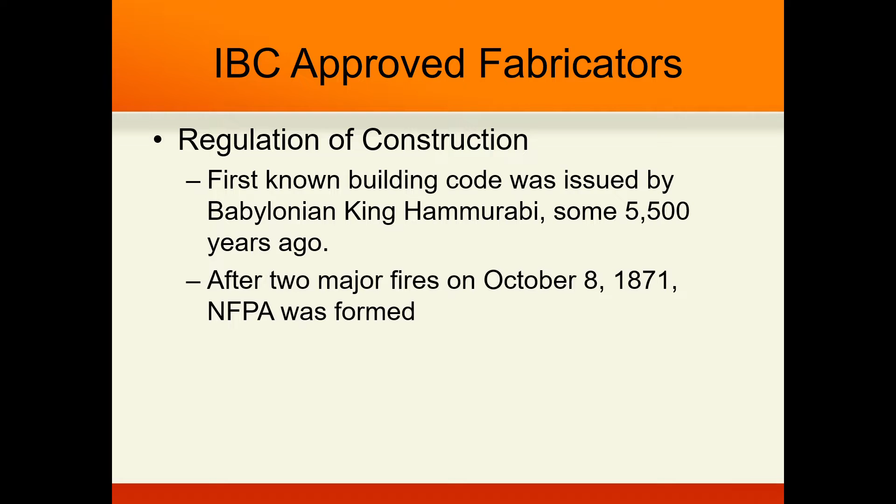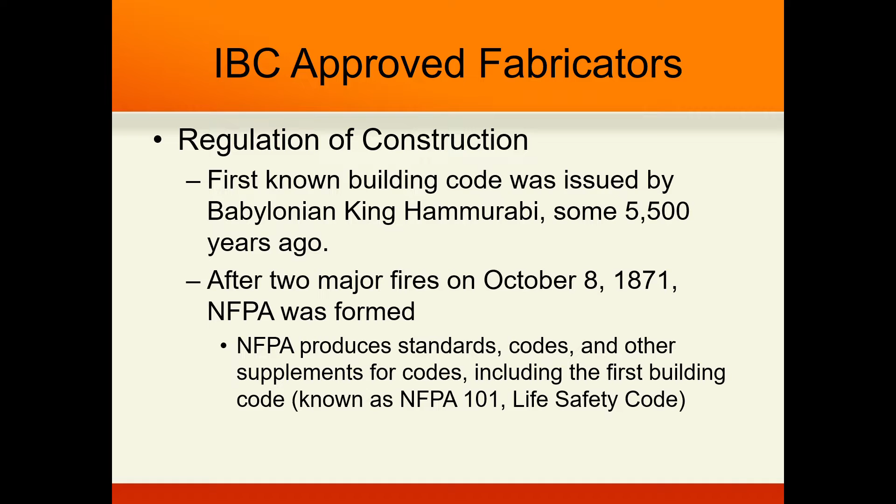After two major fires on October 8, 1871, the NFPA was formed. NFPA produces standards, codes, and other supplements for construction, including the NFPA 101, which is known as the Life Safety Code.

Regulation of construction in today's world has two types of codes. Number one, construction codes. These are codes that regulate how things are constructed. And then, of course, maintenance codes. Those are the codes that are more oriented to how we maintain once we get the certificate of occupancy and we start using the building.

So I want to get into a little bit more of the legacy codes before we proceed, as they lay the foundation for special inspections and for approved fabricators. This is information that we didn't cover in the exiting video, so pay attention right now. This is new information.

The legacy codes were the codes that existed after the original exiting code of the NFPA back in 1927 to the more modern times, which extended all the way to the earliest part of my career. There were three main model code agencies across this country. They had their own three separate codes. They were pretty much similar in many respects, though, and they came together somewhere around 1994-95.

To form what is now ICC, the International Code Council. And of course, the International Code Council published their very first IBC, International Building Code, in 2000.

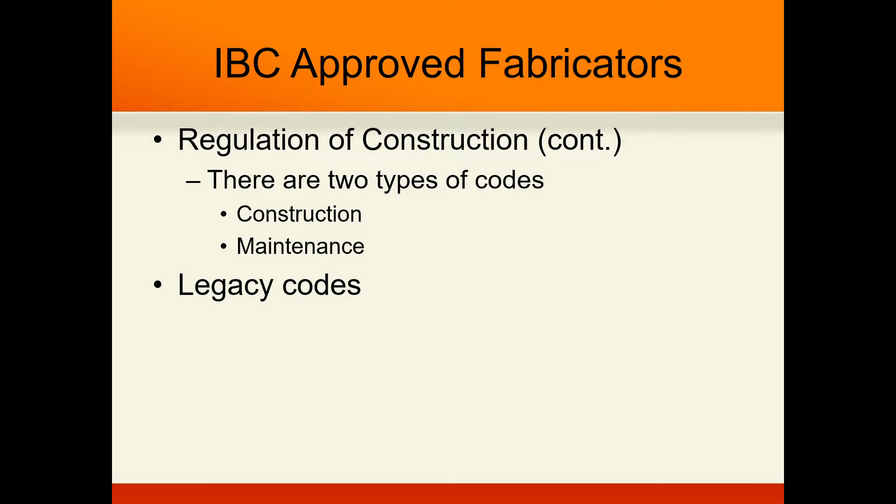So as we know, the legacy code first started with the largest one I think that I'm aware of, which was ICBO, based out of Whittier. They had the Uniform Building Code. It set up in 1927 its inspections for structural components as a requirement for the first time.

And then, of course, the term special inspections came out of the UBC in the 1961 edition.

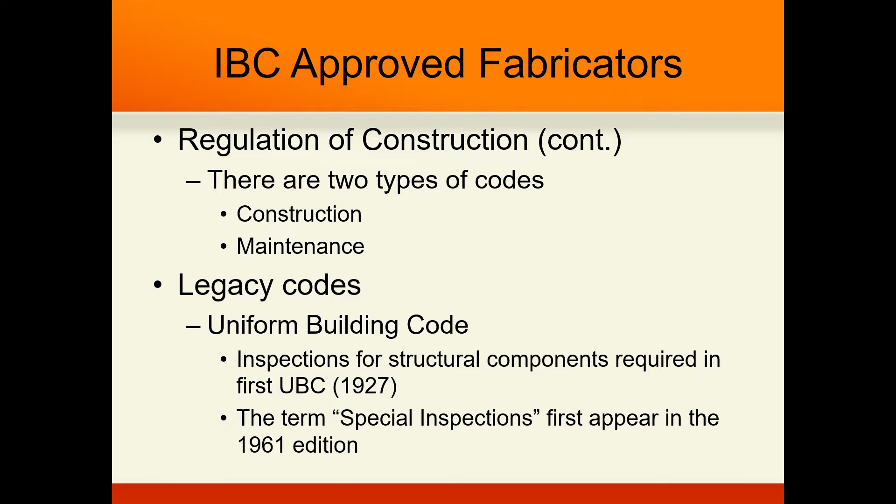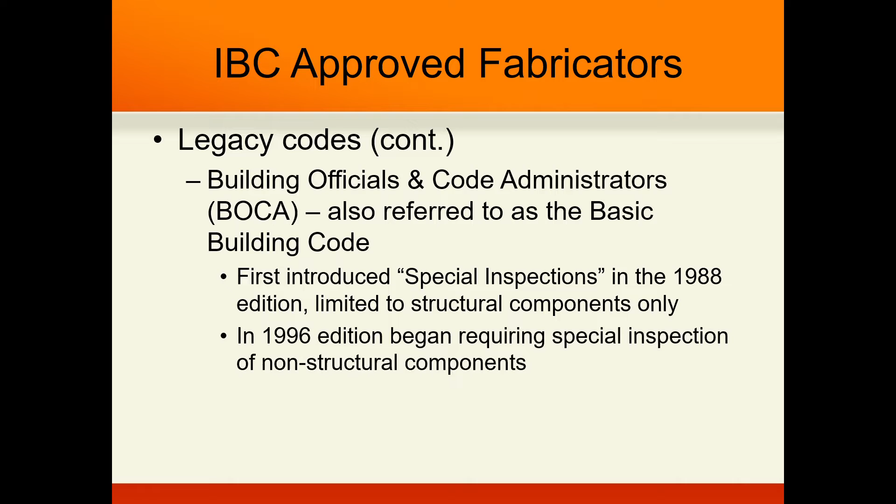Then the second code I want to talk about is the Building Officials and Code Administrators, or the BOCA code, also referred to as the Basic Building Code. The Basic Building Code, of course, first introduced special inspections in 1988 and limited those special inspections to structural components only. And then in the 1996 edition, they began requiring special inspections on non-structural components.

And then, of course, the last one is the Standard, or the Southern Building Code, published by the Southern Building Code Congress. Most everyone referred to it as the Southern, but I remember it being called the Standard as well. It was first published in 1945, so it was kind of the latecomer of those three legacy code groups that did model codes.

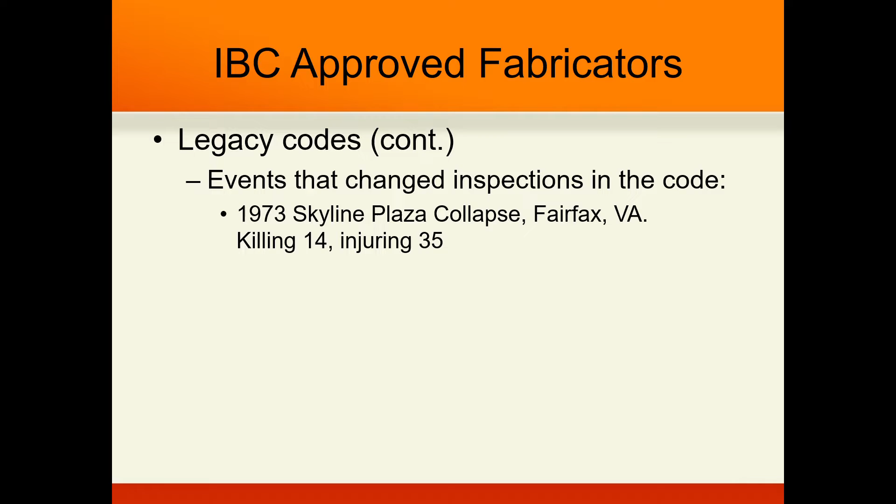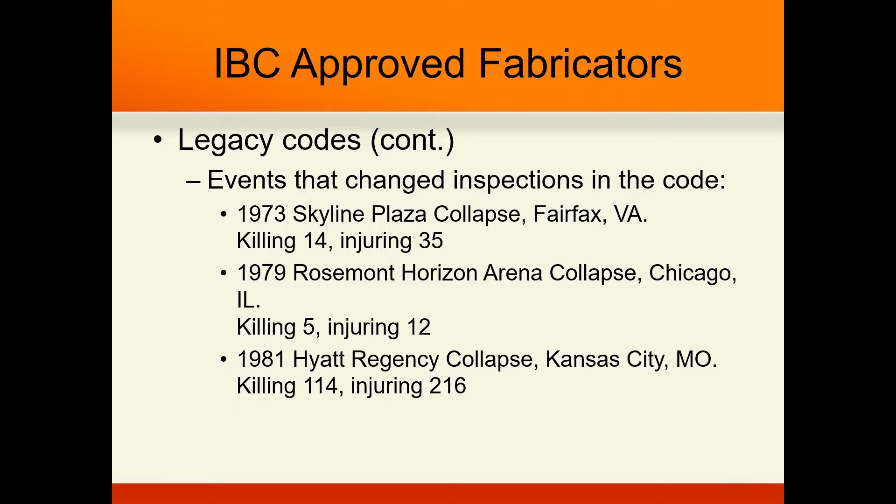All three code development groups were affected by some major events. First was the 1973 Skyline Plaza collapse in Fairfax, Virginia, killing 14, injuring 35. Then in 1979, the Rosemont Horizon Arena collapse in Chicago, Illinois, killing 5, injuring 12. You can look these up. And of course, the one I'm most familiar with, because it occurred very early in my career, the 1981 Hyatt Regency collapse in Kansas City, Missouri, killing 114, injuring 216. To this day, that's by far the most deadly design defect event we've seen in our industry, in our country's history.

I want to remind you that regulation of construction is found in the IBC, the International Building Code, as well as other codes. Be sure to look at the exiting video. Building codes focus on protection during a single event, not multiple events simultaneously - in other words, a fire in a single location, a collapse at a single spot. They don't look at multiple events because it's too hard to control those variables. It would make construction almost virtually impossible to afford economically.

The IBC is also known as a performance code, unlike the legacy codes, which were strictly prescriptive. But as I said before, this isn't a performance code like we see in Europe. It does have in Chapter 1 some latitude to give the building official ability to work with designers to base more on performance, but it still has its prescriptive sections, and that's why we're still a little bit in the dark ages compared to Europe, with their building codes being so progressive with the performance base, laying that responsibility on the designers.

So regulation in the U.S. today - the regulations for construction are found in the IBC. Today, as always, we're going to be looking at the 2018 edition, just because the 2021 hasn't seen widespread adoption. More than likely it probably won't either, just because of the way the cycles work. It probably won't be until the next release in 3 years that we'll see jurisdictions accepting the newer edition.

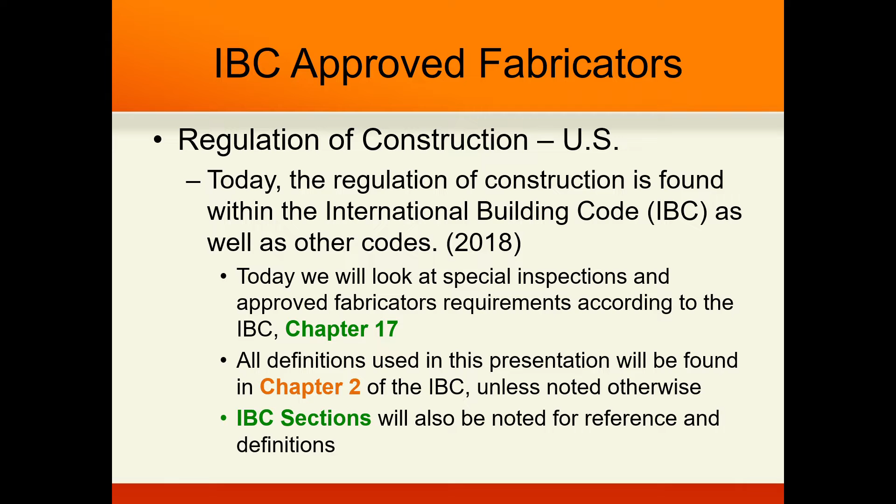Today, when we look at special inspections and approved fabricators, it's all going to be coming out of Chapter 17 of the IBC. Of course, definitions will be found in Chapter 2, may be found in other places, but most of it coming in Chapter 2. And of course, we will always be citing IBC sections, so you have a reference you can go back and look to.

And then we'll move into the special inspections. So IBC section 110 actually names off all the inspections that need to be. 110.2 talks about the preliminary inspection - that's usually typically a kickoff. Of course, then we have our required inspections found in 110.3, and those sub-paragraphs of that.

We start, of course, with footings, then we get into concrete slab and under the floor, our lowest floor elevation, framing. Anyone who's built has seen all these before anyway. Lath and gypsum board being next. Weather exposed balcony and walking surfaces. Of course, fire and smoke resistant penetrations - this is key because usually these are in rated constructions that are very, very important for evacuation of human life in a building during a fire event.

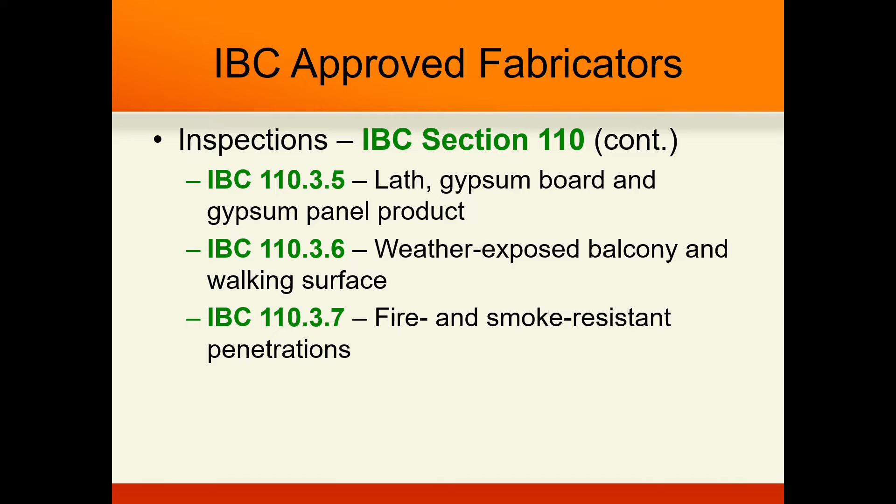Of course, then we've got the energy efficiency, and they have some miscellaneous things listed in 110.3.9. Now we move to 110.3.10, which is the special inspection, and of course it references back to Chapter 17. We're going to spend a lot of this video looking at Chapter 17. And then, of course, our final inspection. After you get your final inspection, usually you will end up getting your certificate of occupancy, your C of O, and the owner will now have use of that space for whatever their needs were when we designed it.

So now we'll look at the special inspections definition. This is the key to everything that we're going to be talking about, because special inspections are the key to the approved fabricator as well as to the field work.

Again, it's looking not just at the code, but at what was designed, to make sure the design intent's being met as well. There are two types of special inspections. There's the continuous special inspection, which means the special inspector is there at all times during the work being done. And then there's the periodic special inspection, which means the special inspector is only there intermittently during the work being done, and that all depends on what is being inspected, what's being constructed, what's being built, whether it's in shop or not.

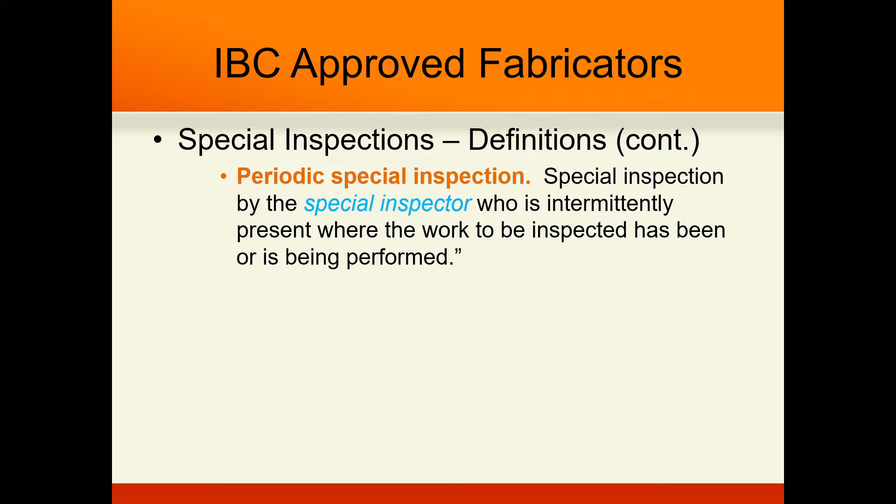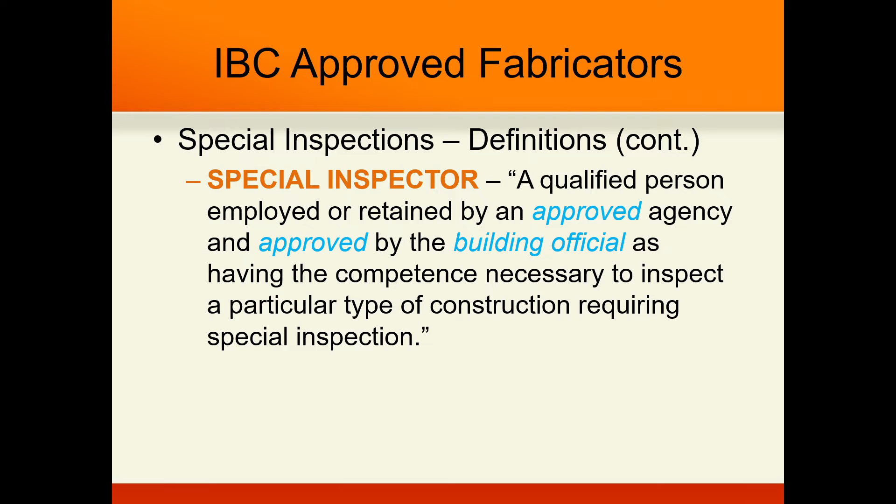Special inspector is defined as a person who is qualified by an approved agency, and that's defined also in the code, and approved by the building official. Sometimes these are people who are highly trained, welding inspectors in particular.

IBC 1704.2.1 mentions the qualifications. It must be documented what the special inspector's competence is related to this. There is one caveat: the registrant of record and their staff for the project may also act as an approved agency. In other words, just as the design engineer or the design architect, you can be the special inspector as well. That certainly carries on liabilities. So if a designer is doing that, make sure you do have expertise in it, because otherwise you're going to be putting yourself into a high level of liability for really not worth the risk, in my opinion.

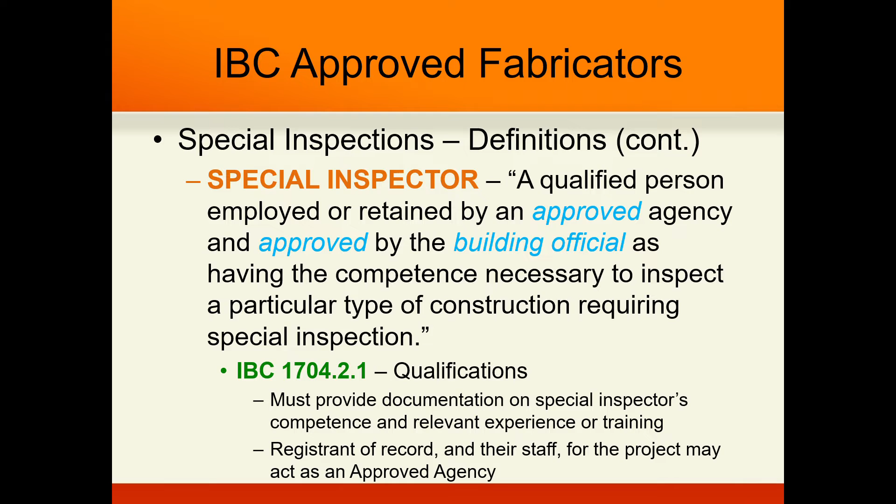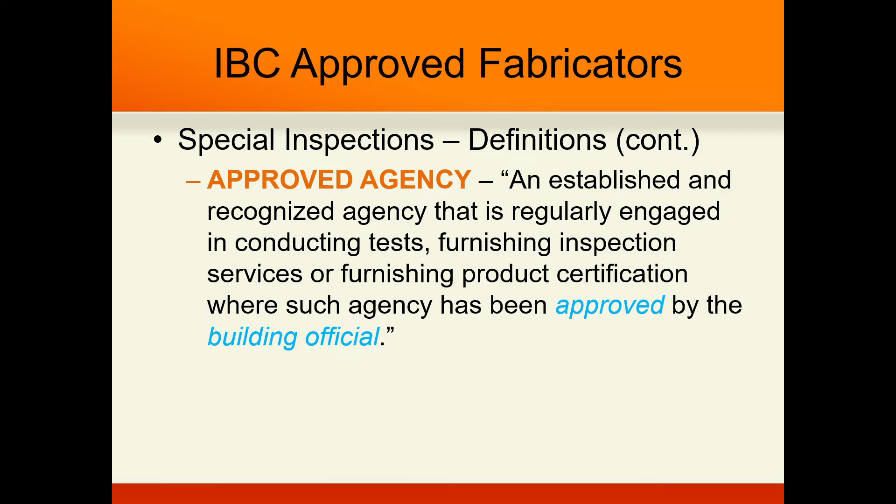Special inspection, the approved agency here - we see what the code mentions, how it is very much approved by the building official. We do have third-party companies out there, and you can look them up on the internet, but those are approved by most of these agencies, and each jurisdiction will have to have their own list, or they may have a couple of them. Several jurisdictions may go together and say, we're going to put this list together and accept it no matter what. Or a smaller jurisdiction may say, we'll accept the list of the larger jurisdiction who's not far away. So it's not necessarily an arduous thing, but it is something every jurisdiction must have. They must make sure they have those approvals in place, just because the code requires it, and it makes it easier for us as designers to comply.

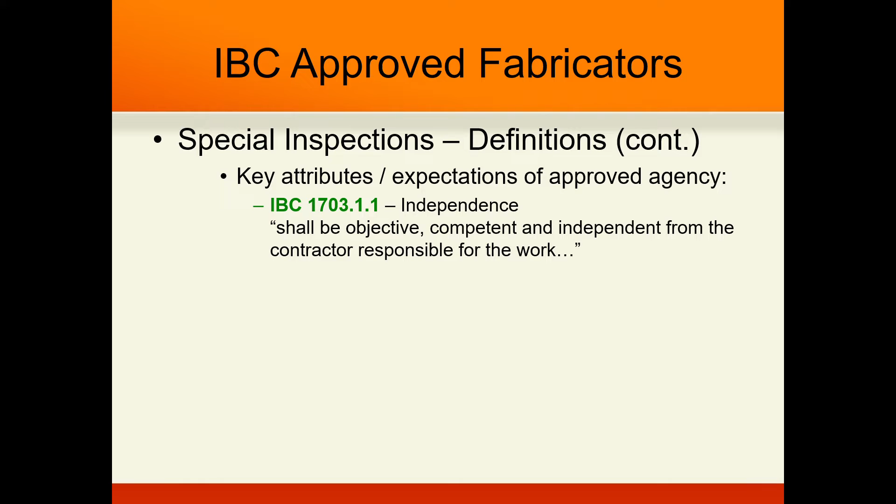Key attributes or expectations of approval of an approved agency: number one, they've got to be independent - independent from the contractor and the work being done. They have to have the equipment; if you're doing testing, you've got to have the equipment. If you don't have the equipment, you're not qualified to do it. So that's a big thing with it. And then, of course, the personnel. Each person responsible has got to be trained, has to understand what they're really looking at, and be capable of knowing if this is being done appropriately.

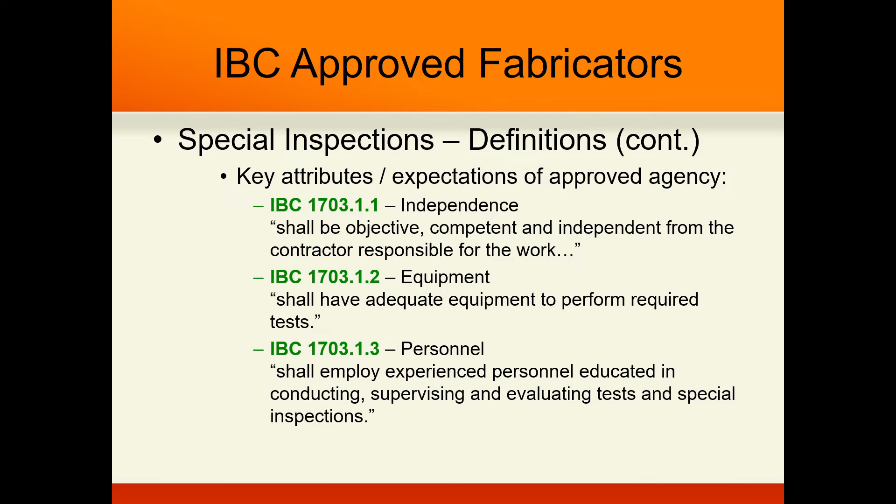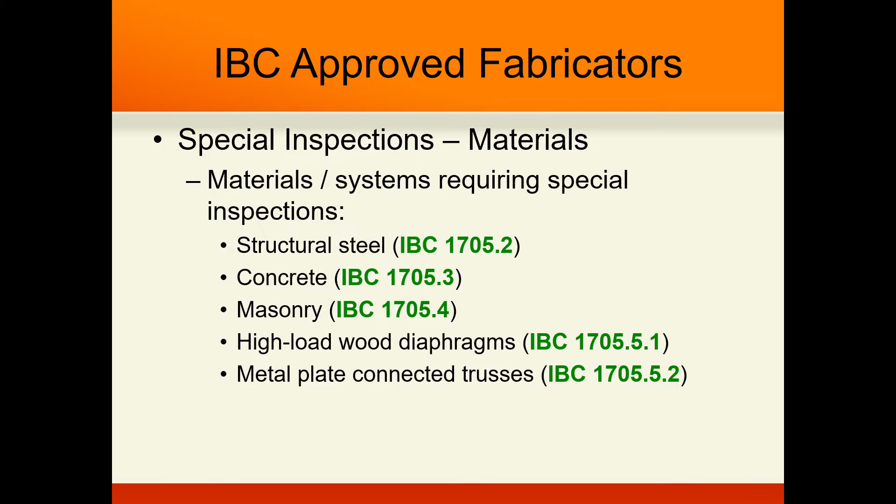Special inspections have materials that we have to call out. You'll see all these sections being called out in the IBC. Structural steel has to be special inspected. Concrete over 3,000 PSI design has to be inspected. Masonry has to be inspected. High load wood diaphragms will have to be special inspected. Metal plate truss connectors - these are the gang nails we see in wood trusses. Soils, of course, is always a special inspection.

Continuing, we have the deep foundation systems - again, these cover 3 different areas of 1705.7, 0.8, and 0.9. Shop fabricated systems: inspections by the fabricator as stated in 1704.2.5. We need to understand that if they're not an approved fabricator, they must do internal special inspections no different than what we do in the field. That's where I see a lot of gaps in the application of this, and since the jurisdictions take the lead on enforcing this, that's really more a gaffe on their end for not following through with that appropriately.

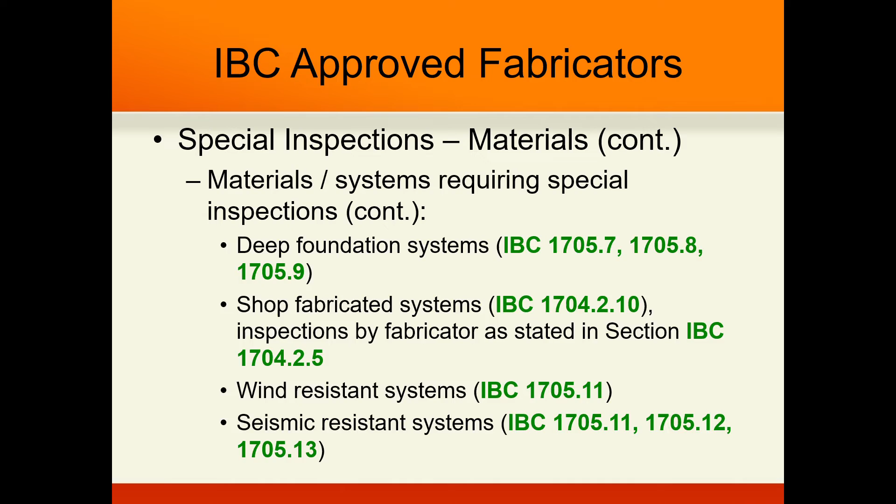Wind resistant systems, anything resisting wind or seismic, those will always be special inspected just to make sure they're being constructed appropriately. Sprayed-on fire resistant material, of course we need to know - that's almost automatic because you've got to make sure it's done right. This is a different type of fire coating system, a very specialized type of fire coating system.

An EIFS system - this is an exterior insulation and finish system. This didn't used to be special inspected. It came up a few years ago just because we had so many failures with it. And I know some architects who'd like to go out there and do it, but unless you have the training, you really need to divert that to someone who's got that background.

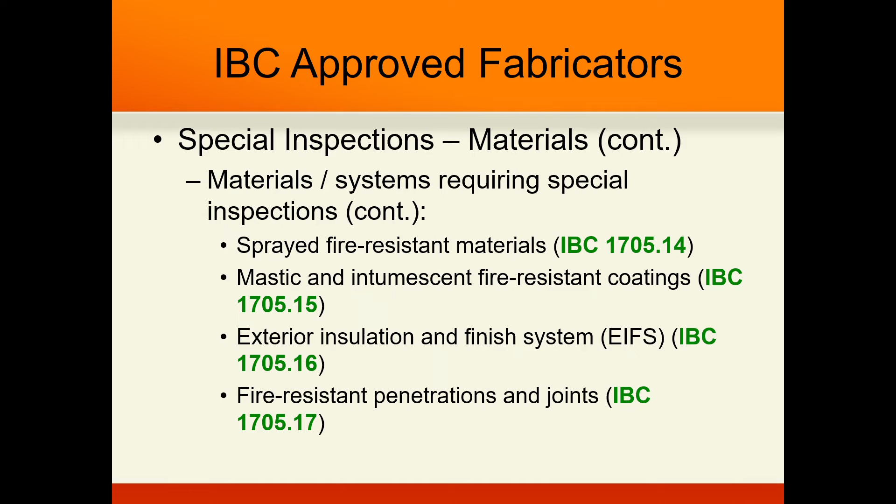And then, of course, all fire-resistant penetrations - we don't need fire getting through a hole in the wall that it wasn't intended to. Smoke control systems, again, required to keep people out. And then any special case as the building official would deem necessary - that's the kind of blanket statement of 1705.1.1.

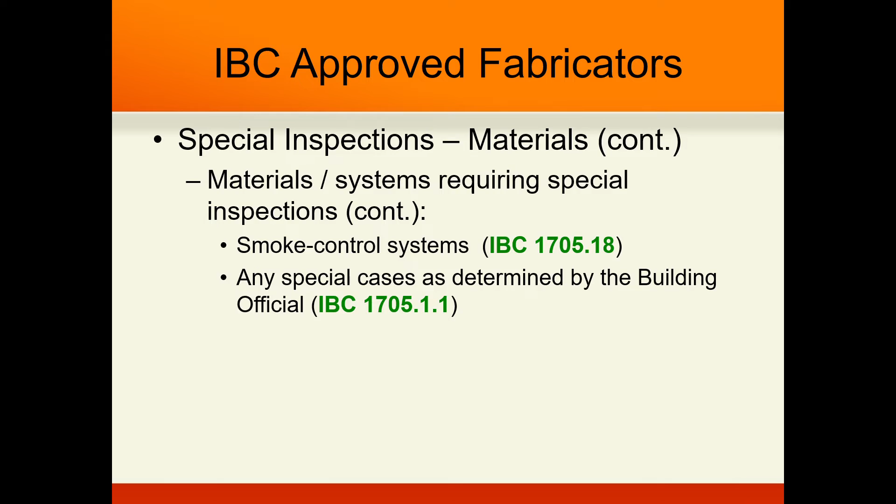So special inspectors still have reporting requirements, and 1704.2.4 out of the IBC lays down what those requirements are.

The required report elements are found in section 3.1 of that same section. Special inspectors, it's not just a matter of getting out there and looking at it—they have to be able to memorialize it appropriately.

Fabricators shall keep all those records themselves according to 1704.2.5. Fabricators shall perform and retain records on inspections of all fabricated elements as if the work was performed on site. That means if you're inside a shop, you don't get a get-out-of-jail-free card. You still have to do those special inspections.

This tends to be what I see as a gap in the industry as a whole. A lot of that is because jurisdictions do tend to take the lead on enforcing special inspections, and this is an area that, for whatever reason, they don't really prosecute as vigilantly.

Special inspections are not required when the fabrication is performed by an approved fabricator. That is the exception, which is why it's important to have those approved fabricators on those lists. However, if you're not an approved fabricator, you fall back to 1704.2.5.1, which says yes, you still have to have those special inspections, shop or not.

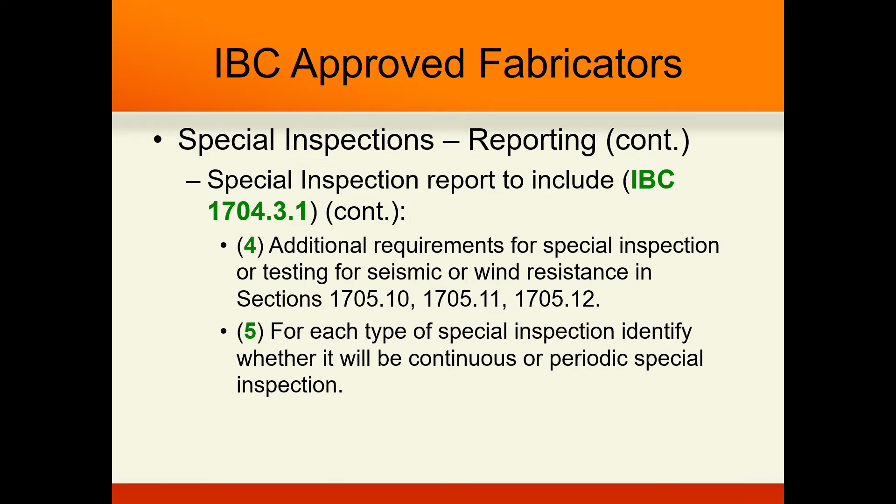That doesn't mean they have to do all these together—it's possible some stuff isn't tested. Continuing on, number four, additional requirements are found in sections 1705, 10, 11, and 12. And then of course the special inspection must identify whether it will be continuous or periodic. You have to report which of the two processes it was.

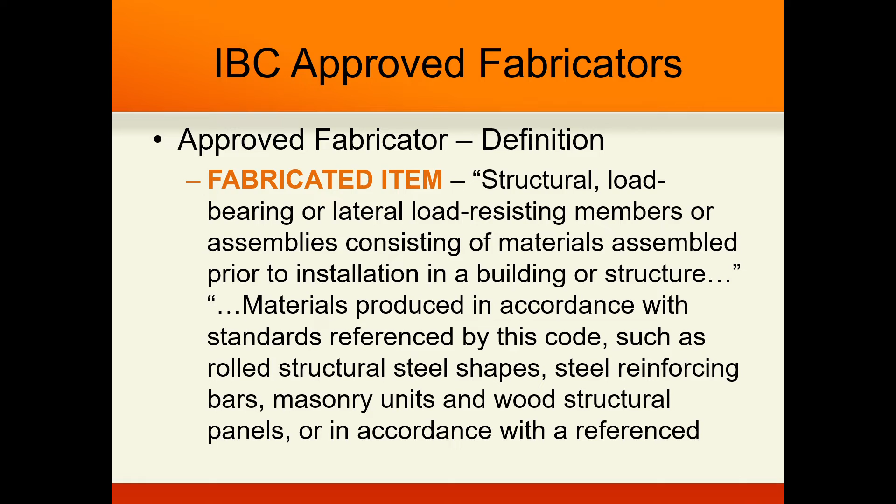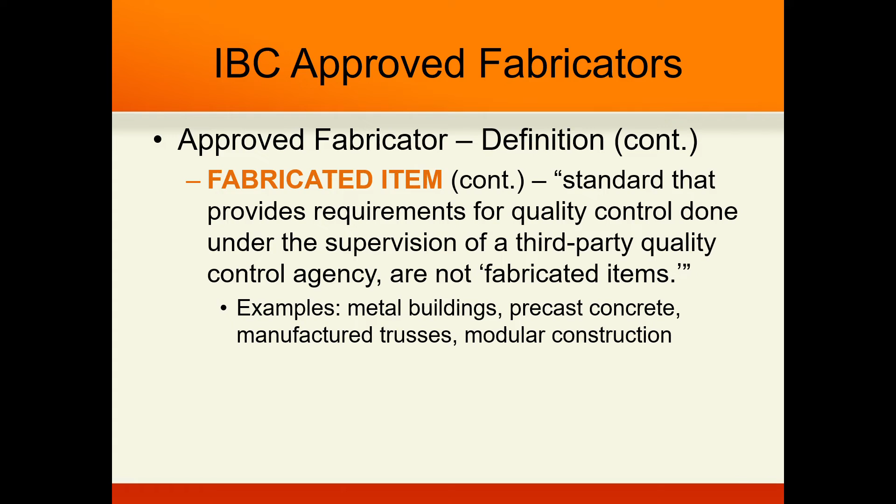Moving on to the second part of this—it provides requirements for quality control done under supervision of a third-party quality control agency; those are not fabricated items. You can see this very clearly. Examples are metal buildings and precast. These are not fabricated items because they're actually assembled in the field.

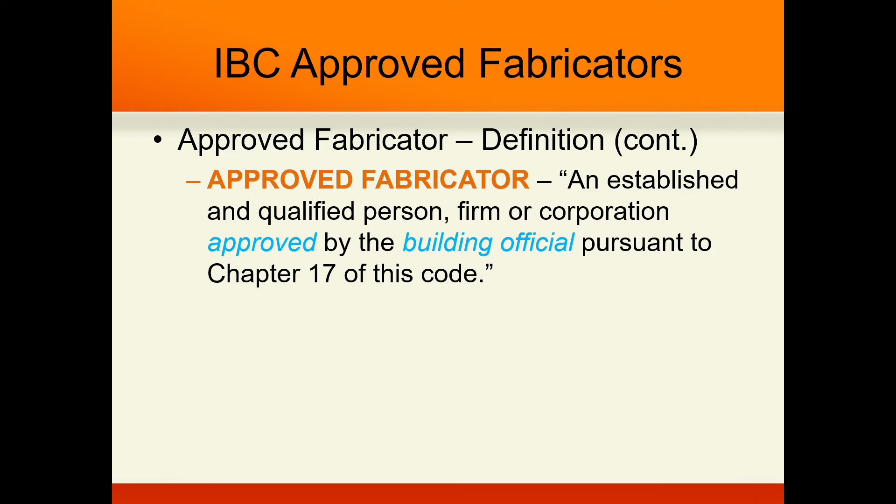An approved fabricator is established and qualified person, firm, or corporation approved by the building official pursuant to Chapter 17 of this code. So this gives the building official the ability to name what an approved fabricator is. Now here's the key: an approved fabricator has to be capable of issuing a certificate of compliance. In other words, they don't just produce this stuff and walk away—they're required to put together a certificate of compliance, a COC, and we'll talk about what those requirements are momentarily.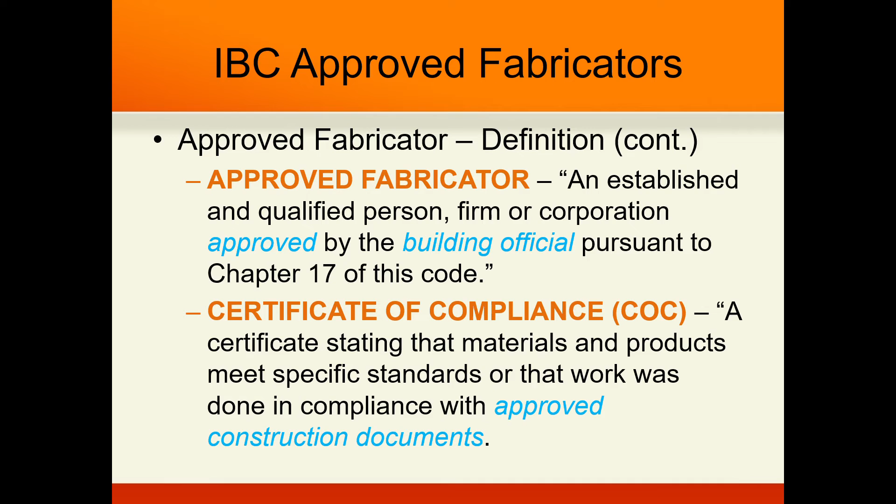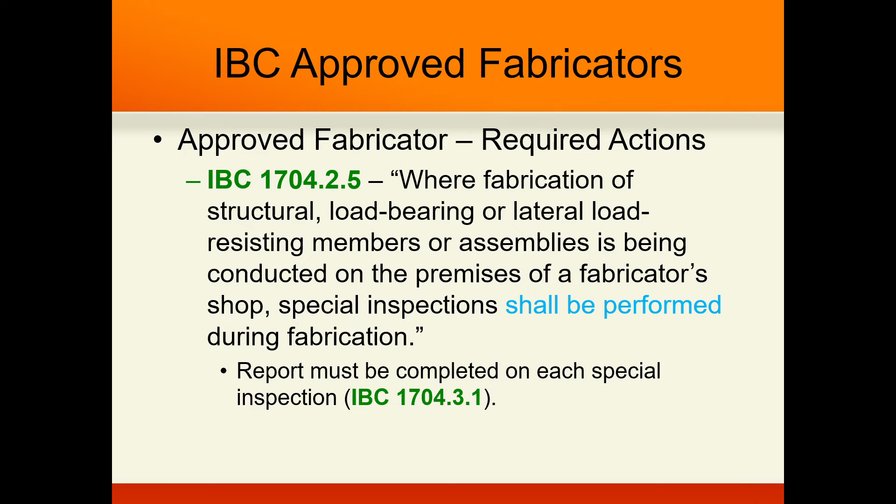These are actions required by approved fabricators. In 1704.2.5, the fabrication of the unit, wherever it is, shall be done on the premises of the fabricator's shop. Special inspection shall be performed during fabrication. Okay, even if you're an approved fabricator, you still have internal quality control inspections you're supposed to do. A report must be completed on each one of these elements and inspections, as we can see here in 1704.3.1.

Moving on, 1704.2.5.1 says special inspections during fabrication are not required where the work is done on the premises of a fabricator registered and approved to perform the work. The approval shall be based on review of the fabricator's written procedures and quality control manuals—and that's why this is highlighted.

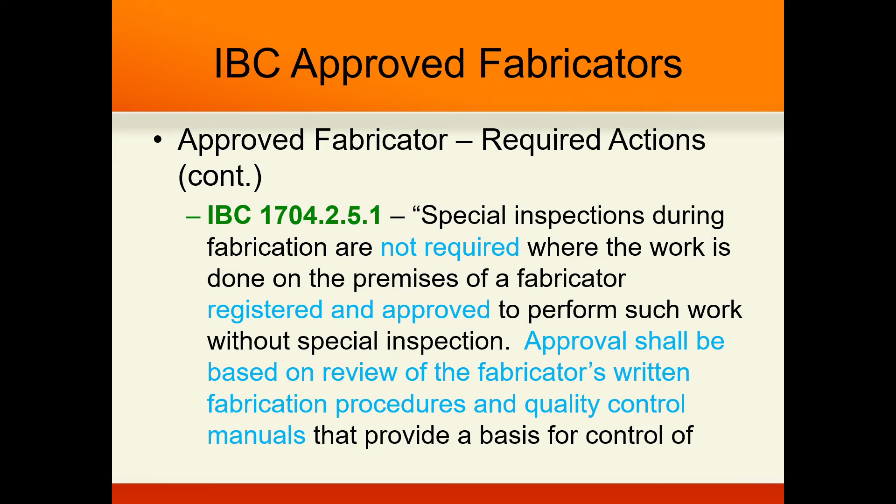This is where a lot of jurisdictions fail, because they tend not to have that record—they don't look at that. I've requested it on a couple projects from one jurisdiction, and they didn't keep those records the way the code said they should.

Again, more information here: the materials and workmanship must have periodic auditing of the fabrication quality control practices by an approved agency. In other words, just because you're an approved fabricator doesn't mean you're not held accountable. Most of these industries have their own quality standards—they even have people go out there and audit it. That's what this is saying.

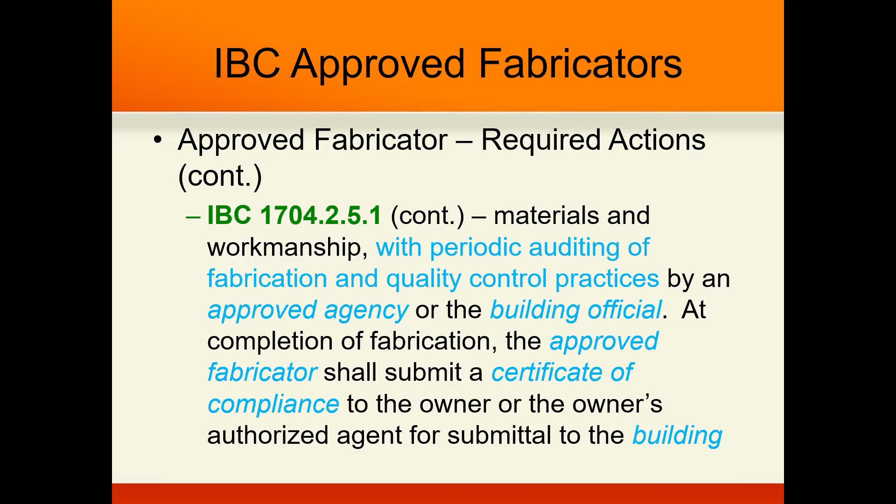And then they shall submit a certificate of compliance after they fabricate everything to the owner or the owner's agent, who then has to submit it to the building official. The interesting thing is, I don't recall ever in my career being asked to submit any of these on any of my projects, whether it was an approved fabricator or not.

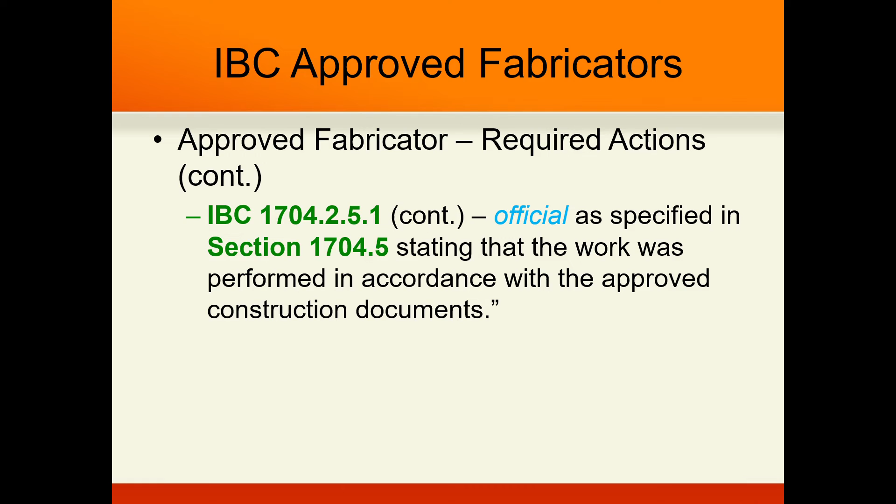And again, that's where the jurisdictions are failing, because this is their responsibility—they should be asking for that before they grant the certificate of occupancy. So an approved fabricator has to be approved through 1704.2.5.1, and it's based on a review of the fabricator's written procedures and quality control manuals, periodic auditing of the fabrication practices by an approved third-party reviewer or the building official, and typically providing QC personnel qualifications.

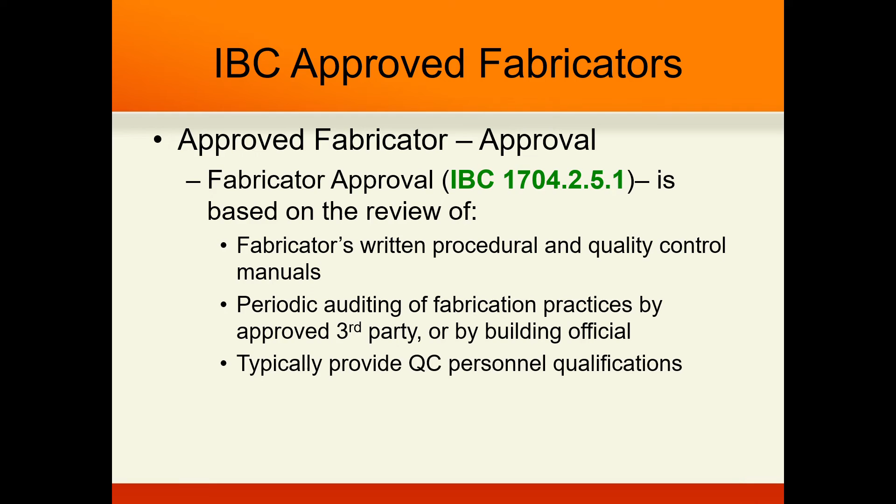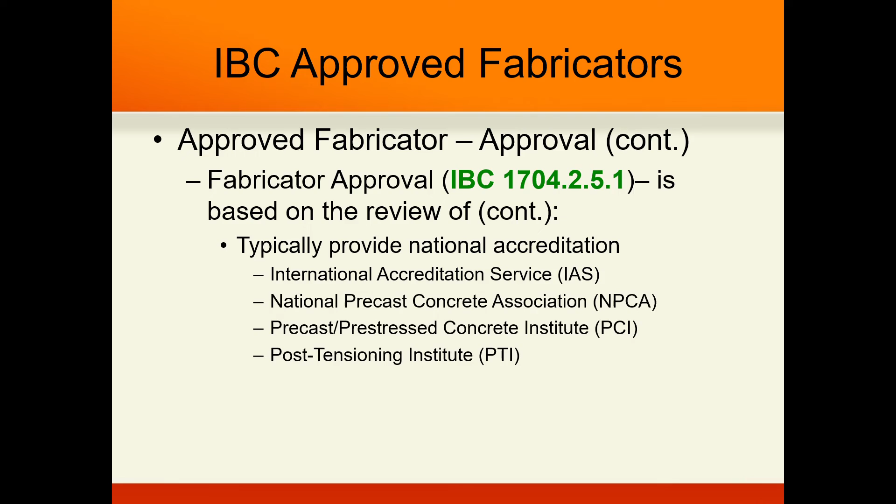Going on, other requirements for this review are on national accreditations. You see some of the potential associations that would grant such types of approvals. This is all cited directly out of the building code as well.

Now we get to the certificate of compliance. This is specifically out of the IBC 1704.2.5.1. It has to be provided at the completion of fabrication, and must be provided to the building official. Like I said, I've never had a building official ask for it, whether it's an approved fabricator or not.

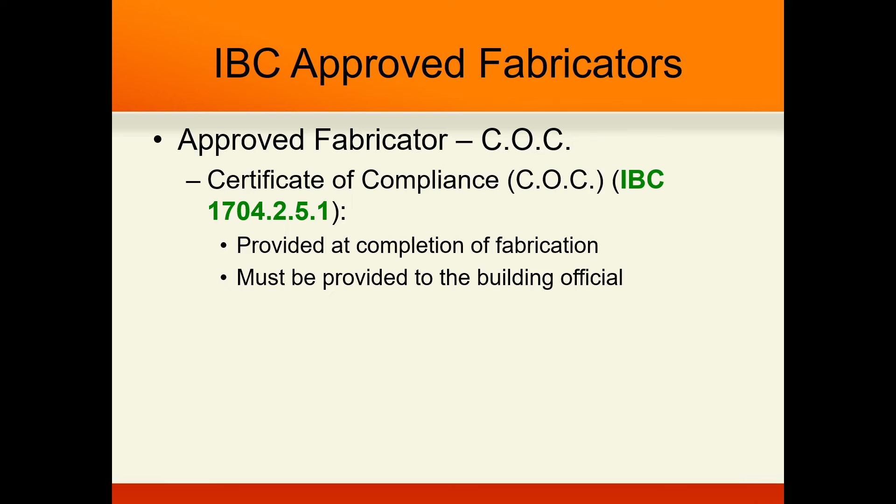If it's not an approved fabricator, by the way, it requires the same special inspection submittals that any other field erected or constructed component would have. It must state that the work was performed in accordance with the approved construction documents. The COC, if it doesn't say that, it's not going to be compliant with the code. It's similar to a final inspection report that the jurisdiction would do to show, hey, you're done, you're completed, you can move on.

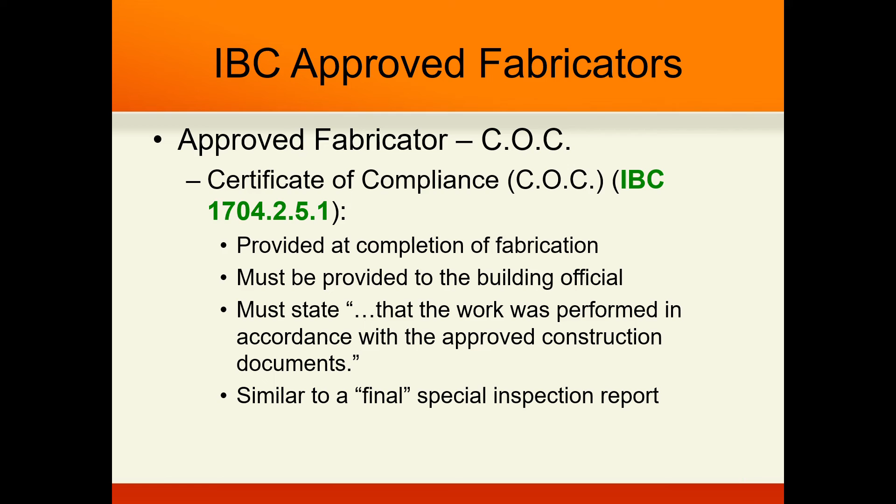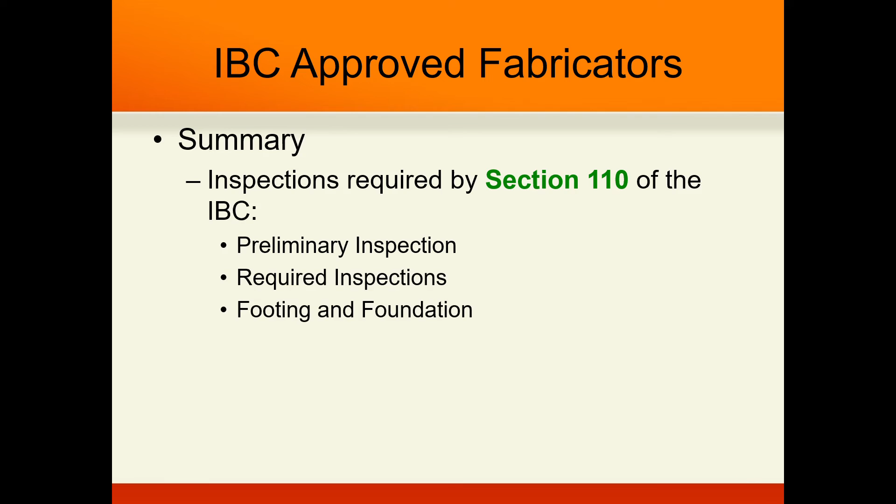So now let's get into a summary of what we've been through. There's been a lot in this video already. Inspections required by Section 110 of the IBC include preliminary inspections and required inspections: footings, concrete slab and underfloor, lowest floor elevation, framing, lath and plaster.

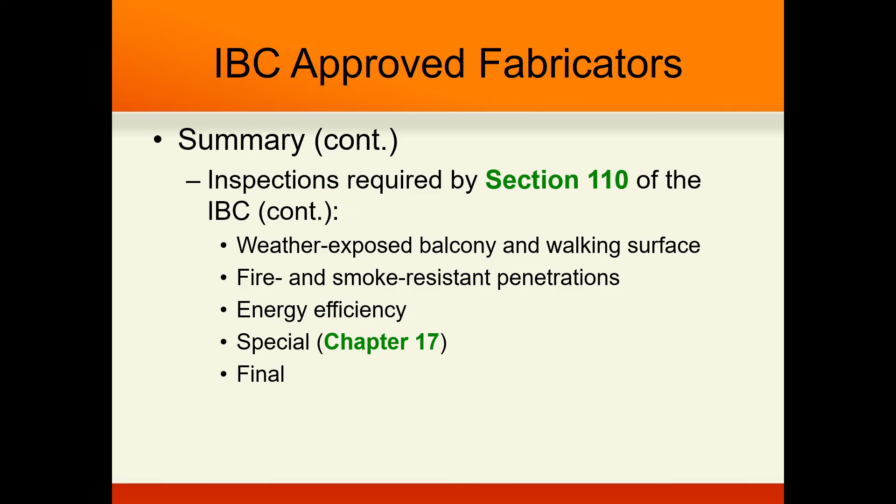Weather exposed balconies, fire and smoke penetrations, energy efficiency, so anything special which is out of Chapter 17, and of course the final. And of course the final gives us what we want, what we're working for with the owner, and that is a certificate of occupancy.

There are two types of special inspections. There's the continuous one, where the special inspector is there the entire time the work's being done. There's the periodic one, where it's only during certain phases, or they come out, especially if it's on a large construction site. Special inspectors have to meet certain criteria and qualifications.

Can't just be anyone. The agency performing it has to be independent. They have to have the equipment, they have to have the personnel. It's not just some guy in the back of a truck saying, hey, I can do it. You have to be qualified. The agency has to be capable of funding and supporting that type of work of staff.

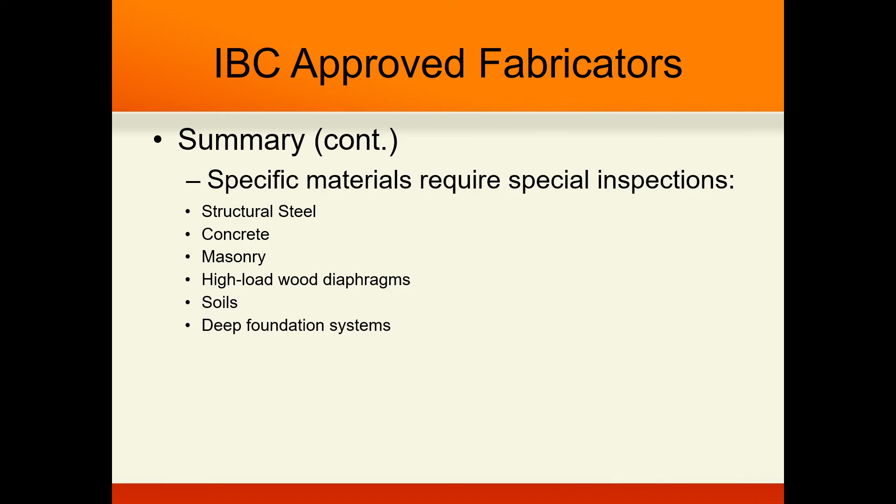And of course now, materials. We have structural steel, concrete, masonry, high load wood diaphragms, soils, deep foundations. We have wind resistant systems, seismic resistant systems, sprayed fire-resistant materials, EIFS being another big one, fire resistant penetrations, smoke control systems, anything that the building official might say, you know what, we want to also make that a special inspection as well.

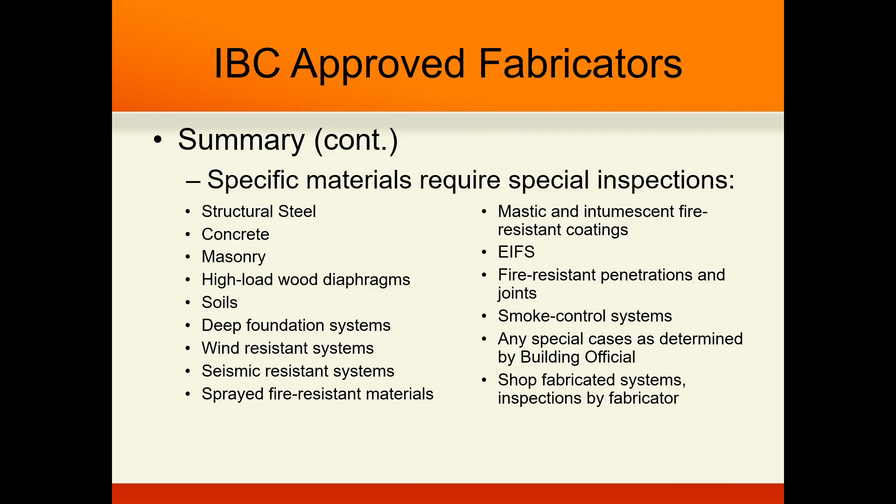And then shop fabricated systems inspected by the fabricator or a third party, depending on if they're an approved fabricator as well. Specific information to be reported in these special inspections are found in IBC 1704.2.4. Fabricators shall keep records of all special inspections, and approved fabricators are not required to perform special inspections, but they do have their quality control checks that should be recorded, and again, they must put that COC together.

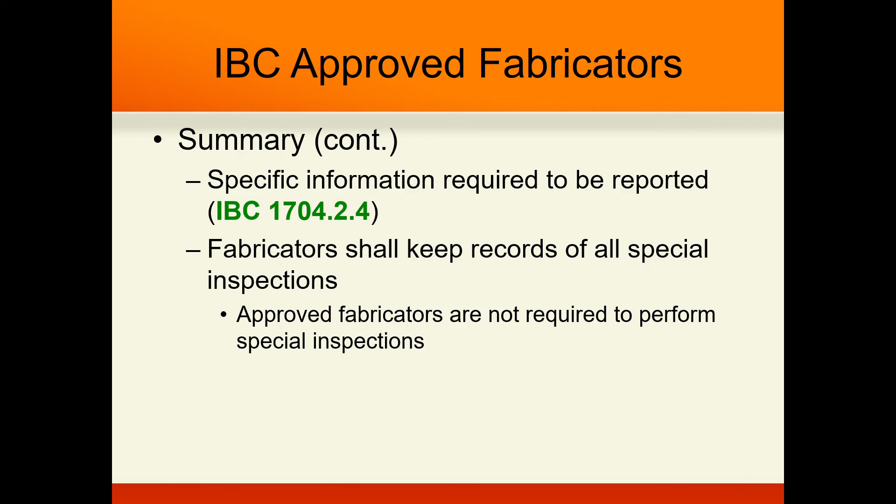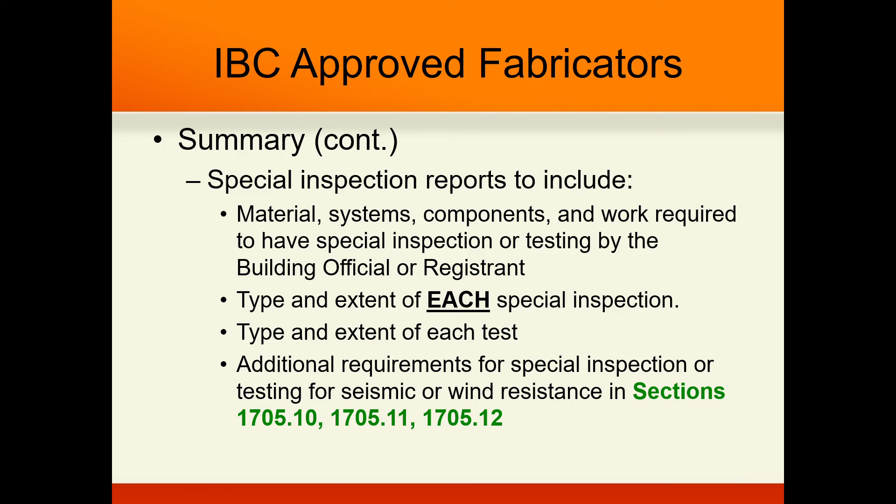Special inspection reports include the material, the systems, the components, testing that is required, the type and extent of each special inspection, the type and extent of each test, and whether the additional requirements from seismic or wind, Sections 1705, 10, 11, or 12, need to be noted.

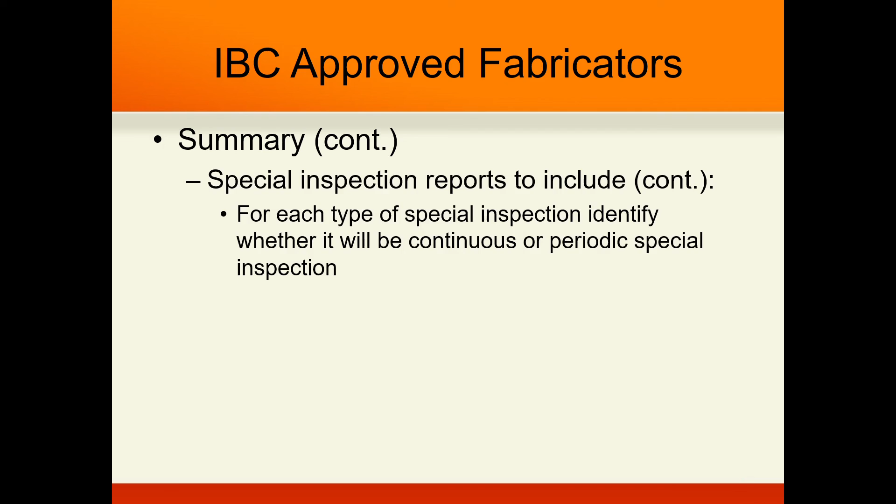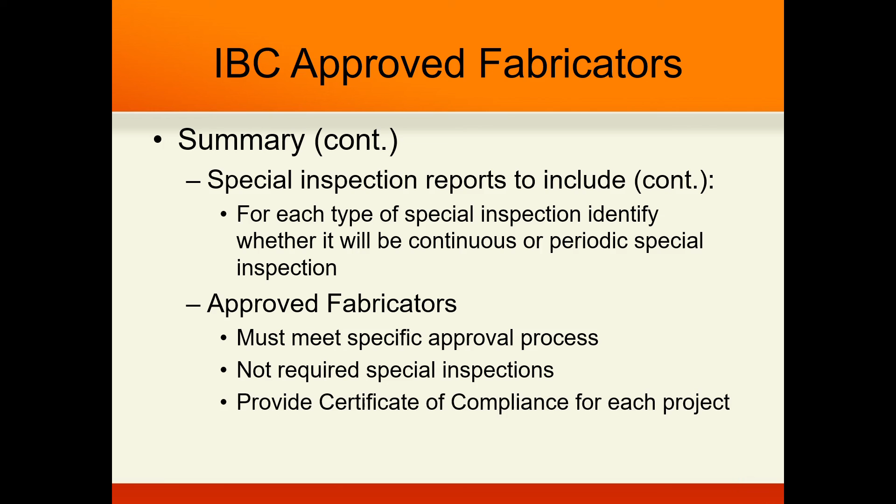Special inspections also should have the type of inspection identified, whether it was continuous or periodic. And of course, for approved fabricators, they must meet the specific approval process. They're not required to do special inspections, but they still have to provide that COC for each project.

As we can see, the required inspections, special inspections, shop fabrication requirements, and approved fabricators are all very complex issues at times. Once you use this as a launching platform, whether you're a designer, specification writer, or a code official, you can get these items correct.

There are a lot of times that the jurisdictions who have the final authority on this don't follow through with it. We as designers tend not to know it or require it ourselves. We don't put it in our specs, and that leaves a gap in the system that could potentially raise the risk to our clients, to the project, and long-term to society.